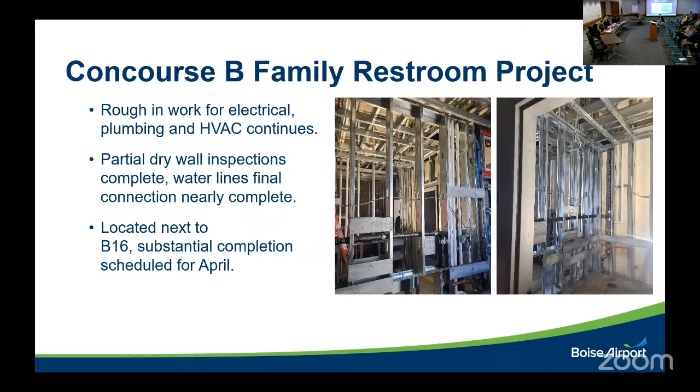The consolidated rental car facility is a highly visible project as you're driving into the airport, on the right-hand side of the entry roadway. Level 5 is a third complete. The first concrete placement for the ramps has also been completed - those are the ramps you use to drive into the building.

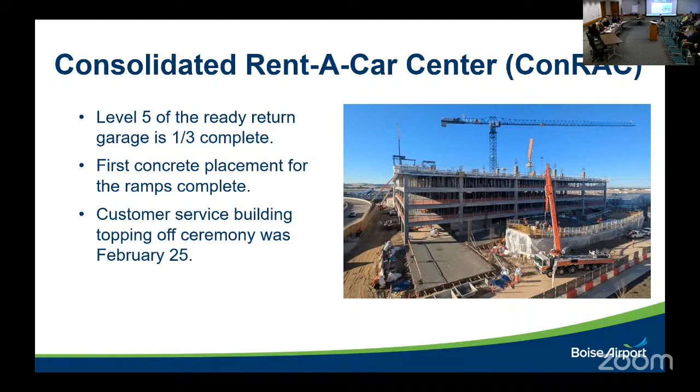And then the customer service building - we had a topping off ceremony on February 25th, meaning it has reached its highest point today. Very exciting to see that project. As a reminder, that will be completed in '26, in the spring, late spring or early summer of '26. So this project is still a ways out, but substantial progress is being made every day.

The concourse development program, terminal improvements. We are working on refining the facility program needs, identifying what is needed based on the forecast, developing a basis of design, and then we'll begin concourse visioning in March. We have Jacobs Project Management as our owner's representative, again, to provide us advice and counsel as we go through this very large and complex process.

We are working on what is called a construction manager general contractor RFQ here. In other parts of the country, it's referred to as construction manager at risk.

It basically allows us to bring the construction firm on board as part of the design process and provide input. And it's based on qualifications rather than price, and then we'll bid the price items further through the process.

So we released the RFQ on January 31st. Responses are due on the 12th of March. I think we probably have substantial interest in that project. Again, we expect it's going to be a concourse with 10 gates. There could be other components as well, so we are expecting substantial interest. There will be a selection committee, and that will be time consuming, but it'll be very much well worth it. We want to make sure that we get the right partner on board.

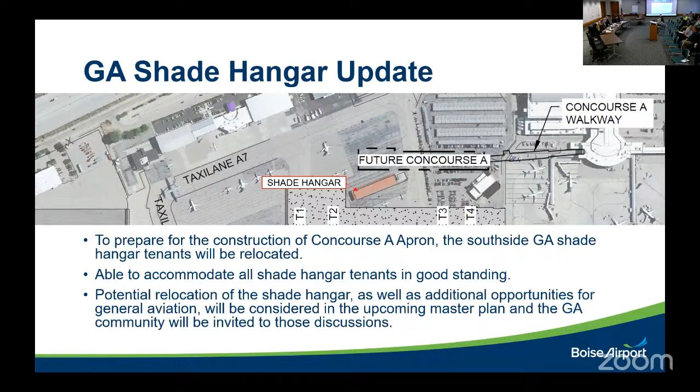And more exciting news on the air service front. Frontier Airlines has announced that they're returning to Boise. Starting in May of this year, they will offer nonstop flights to Denver, so that will be exciting. And of course, Denver is their hub, so it will provide easy connectivity to destinations across the US and Mexico.

I mentioned earlier our topping off ceremony for our car rental facility. This was a celebration of the team celebrating the topping off of the consolidated rental car facility with our partner McAlvain on this project. As customary in this particular situation, the employees who've worked on the garage signed the beam, and we just celebrate the event because it is a momentous occasion. So yes, good job to our team. You guys crushed it.

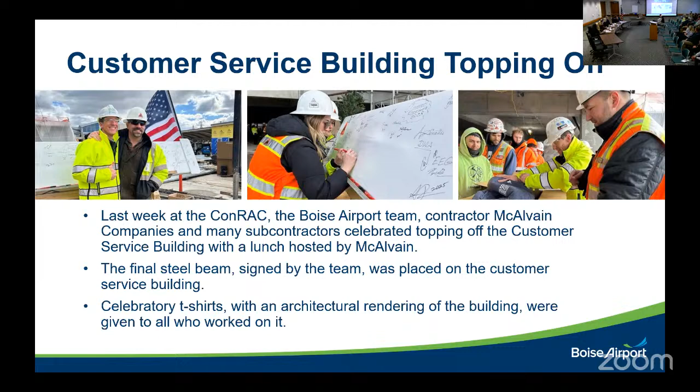We are also debuting a hidden disabilities program, part of our efforts to be a welcoming city for everyone. We're the first site in the city to implement this. Many times people have a disability that's not visible, so this allows someone to wear a sunflower lanyard, and employees will know that designates a hidden disability, that this person might need help in some way they might not otherwise know. It's discreet, but lets employees know a passenger might need additional help. Airport staff will be trained, and we'll work with our tenants to train people on it too. This program isn't just in Boise, it's been implemented in other places across the country, so some of our tenants may already be familiar with it, but we'll be rolling it out here.

We have some promotions to highlight. This is really exciting: Thomas Anderson, Matt Cooper, and Hannah Hoke are all being promoted to the role of duty manager. That's a new role we added about three years ago. The intent is to have a manager on site, not just in a particular area, but someone with oversight of our entire operation, land side and air side, who can be our eyes and ears when we're not here, because as much as we love this place, Alex and I cannot be here 24 hours a day, seven days a week. And Maribel has been promoted to senior custodian. We're excited to see employees promoted within our organization.

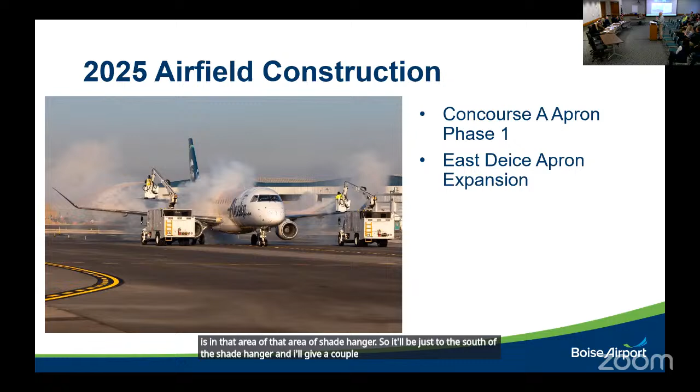As Rebecca was discussing, in 2025 we will be constructing the Concourse A apron, which is essentially between Concourse C, where Alaska aircraft are, and taxi lane A7, in that area of the shade hangar. So it'll be just to the south of the shade hangar, and I'll give a couple exhibits so you can see. We worked with Rebecca to make sure we impacted the shade hangar as little as possible this year.

But with the construction and everything, the south side of the shade hangar won't have access, just because of where the construction is and how the apron is being built.

So the two main projects for 2025 are the Concourse A apron phase 1 and the east de-ice apron expansion. I'm giving you the overall phasing here, because one of our goals is to try to limit the impact to airfield operations with our projects.

Right here, that's going to be the Concourse A apron project. And over here is the east de-ice apron.

What's happening is when we build this, we have to close down a portion of taxiway alpha because we're building in the safety area. So there won't be any aircraft able to use alpha in that location.

So with coordination with the air traffic control tower, we're closing down the north runway 10 right to allow for back taxiing. If you see the blue area, those are all areas open to taxiing for aircraft. As you can see here, this portion of the runway is closed for taxi purposes, but anywhere you see the blue dashed lines, that will be open.

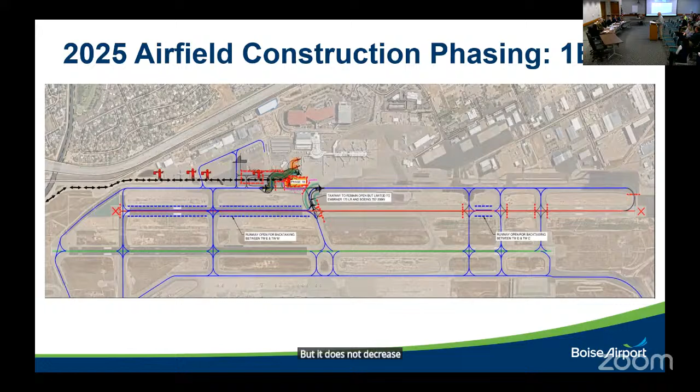It may impact — I will say it may impact some GA with being able to do training like touch and goes here, just because the flight pattern gets so busy with only one runway.

So as Rebecca was discussing, it kind of gets faded out, but here you can see the new area of pavement for the Concourse A apron. And that's going to be concrete — approximately 16 inches thick. So it's a sizable project. That's to carry all the aircraft. We're thinking it's going to be mostly 737s, and our design aircraft for that is a design group 3 aircraft.

Can we go back, Rebecca? So with that, as you can see, right here in this southwest corner it gets super, super tight. So that's why we're closing this portion of the shade hangars — because everything is so tight to get in there. So that's the reason why.

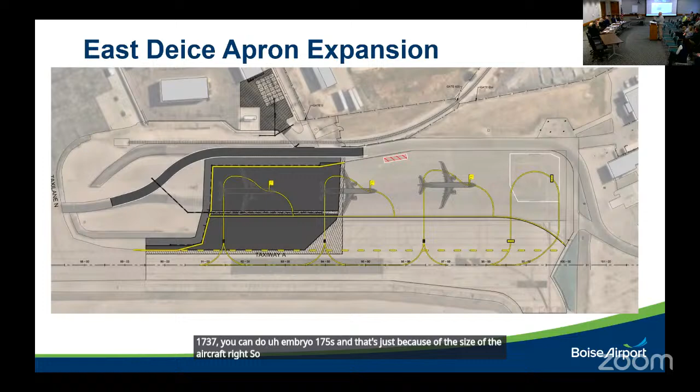Marcus, currently is it just one plane at a time that can be de-iced? Essentially, yes. With a 737 you can do 2 Embraer 175s instead, just because the Embraer 175 is a lot smaller than the 737.

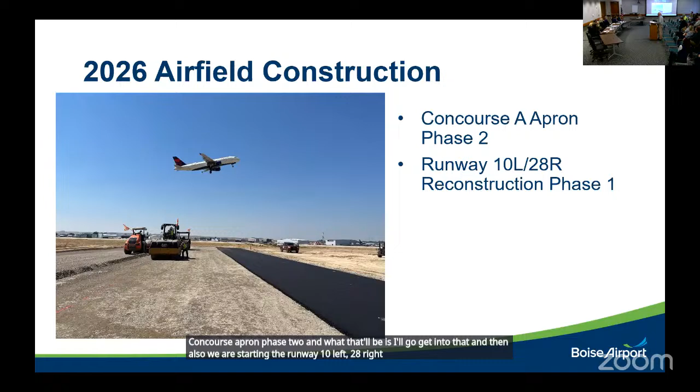So that would wrap up this year's construction. Going into 2026 would be the Concourse A apron phase 2, which I'll get into. We're also starting the runway 10 left, 28 right reconstruction project, which is a major project.

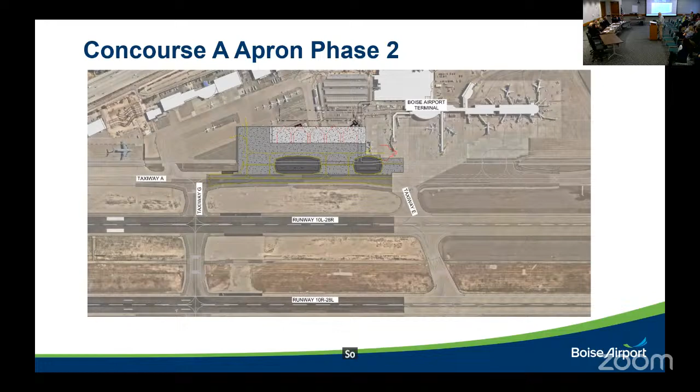With phase 2, essentially that completes the south side of the apron for the new concourse. You can see it right here in the light portion, that would be that area. That construction will have pretty limited impacts to any airfield operations.

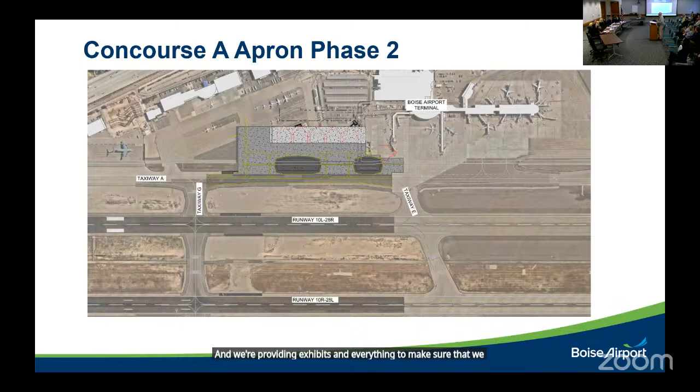The only thing it does impact is Alaska right here, because we're working next to them. Just like in phase 1, we've been working with Alaska, giving them the plans. We've already met with them and are providing exhibits to try to limit impacts to their operation.

That right there is about a 30-day process, because of all the paint and everything that has to be done. So we're trying to see if we can work that into this fall. But one issue is the Concourse A apron and how that falls construction-wise. That's our plan, but if it gets delayed, we may have to wait till next spring to do that.

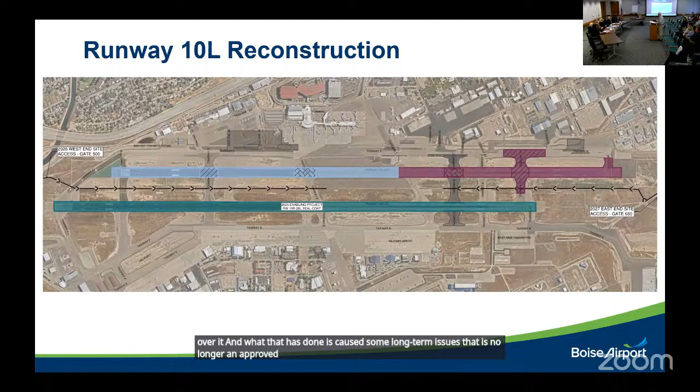In some of those areas out there on the north runway, the asphalt is up to 36 inches thick, so 3 feet of asphalt. That's because of previous deals where it was cheaper time-wise to just pave over it. So that's what they would do. That has caused some long-term issues, and it's no longer an approved method of doing things. Any questions on that?

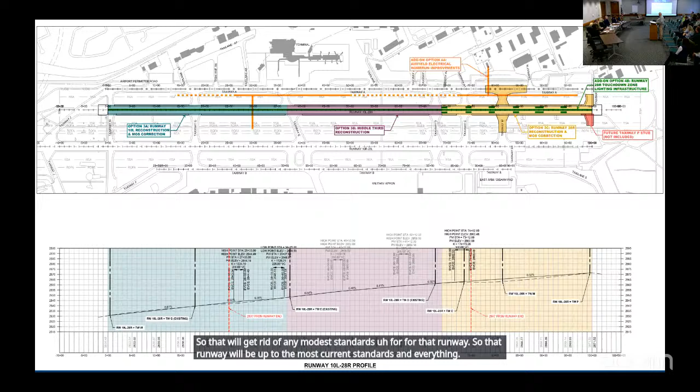Phase 1 will be about 180 calendar days. With this, we're also taking care of MOD standards, FAA standard issues, where we have a vertical curve in the first quarter of our runway, which is no longer allowed by current FAA standards. So we'll be removing those vertical curves and going to a more tangent section, which will get rid of any MOD standards for that runway, bringing it up to the most current standards going forward. That's what that exhibit was showing.

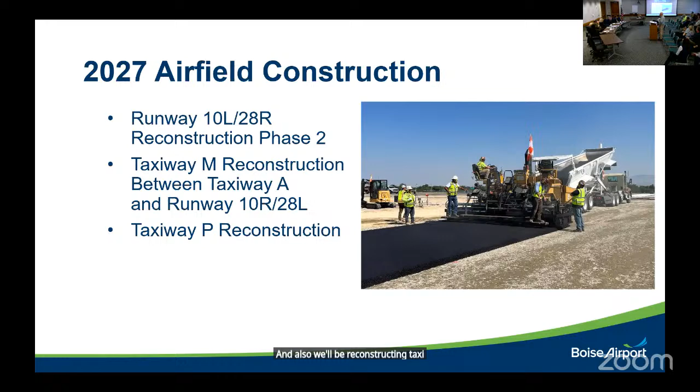2027 will be Phase 2 of Runway 10 Left, 28 Right reconstruction. With that, we'll have to reconstruct Taxiway Mike between Alpha and 10 Right, and also reconstruct Taxiway Papa. That will be the purple area here.

With the previous vertical curve essentially right in this area, it's low, so we have to build the runway up in this area. To meet current standards for all the slopes for the runway, we're actually having to rebuild Mike that goes into Alpha as well. And we'll be rebuilding this portion of Papa just because it's a good time to do it, and it hasn't been touched in several years.

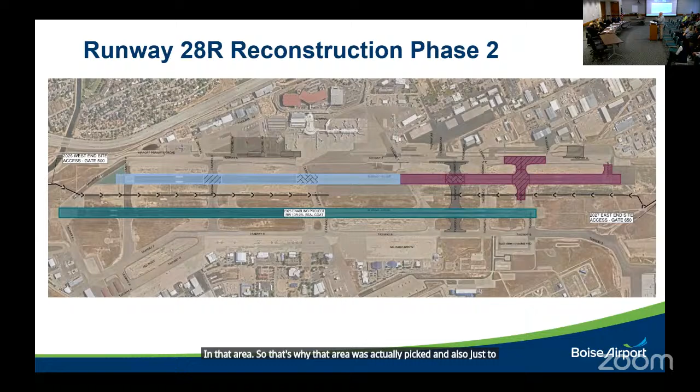Again, this is about 180 days. The reason this area was picked was essentially so we can open the runways between the winter, with both runways operational, and we're tying in essentially at the same grades in that area. That's why that area was picked, and also to make sure it can all be done in one construction season. Any questions?

Okay, 28 and 29 then. As soon as we get done taking care of the north runway, we're on to the south runway. The south runway needs to be reconstructed as well. That asphalt is also coming to the end of its design life, its useful life. Also, the FAA does not like the displaced thresholds as we have here. They think it causes some issues with wrong runway landings.

So we are working on this, and that is to help safety and everything. The plan is to realign the thresholds for both runways so the runways will be identical, both 10,000 feet, with the thresholds lining up identically with each other. So one won't be longer on one end and shorter on the other.

In doing so, the Runway 10 Right on the east portion will be lengthened by about 1,700 feet, and then in 2029 we'll be reducing the other end by about 1,400 feet. That will equal out, because right now the north runway is 10,000 feet long, and the south runway is 9,763 feet long, so just a little bit of difference.

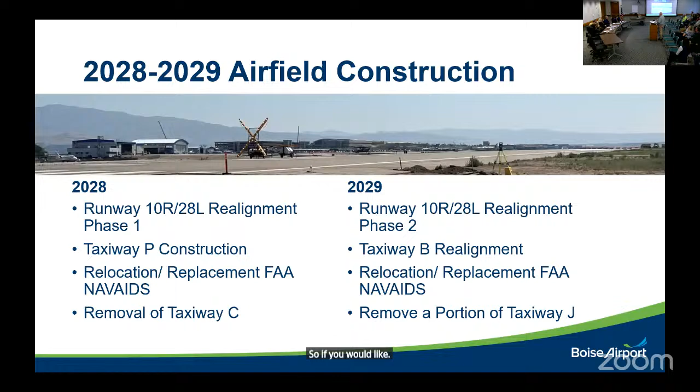Also with that, we're working with the Air National Guard because their mission is potentially changing, so we're coordinating to see if there are any new changes that may be required for their mission. We include that in the design and building so we're not closing the runway multiple times. One is the potential for arrestor barriers, so we've been in coordination with the Air National Guard to make sure we're incorporating that as well, if needed.

So that will be year 2028, and also that will include the relocation of the localizer and some of the glide slope and the ALSF-2 lights on the east end.